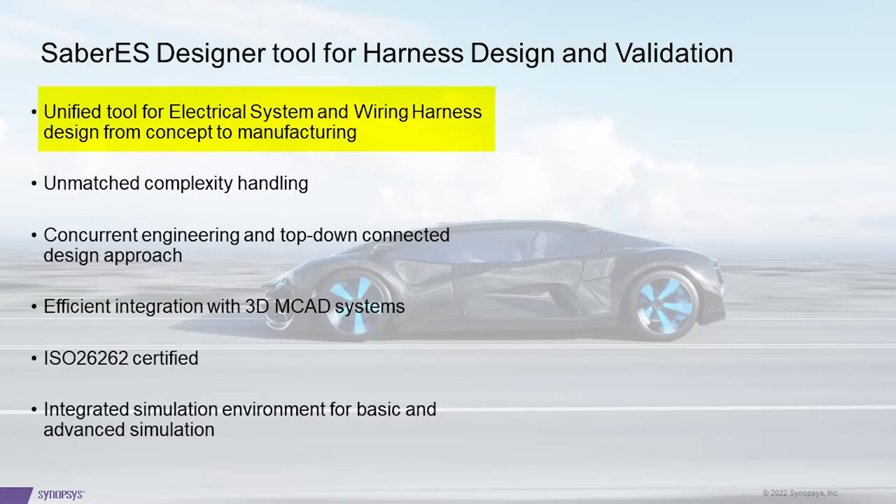The topics which will be discussed are introduction to SaberES Designer, what is custom bundle design and its benefit, a demo of custom bundle design flow in SaberES Designer, and the summary. Designing and validating a modern vehicle wiring system is a significant and challenging task. SaberES Designer provides an efficient solution to do this from concept to manufacturing.

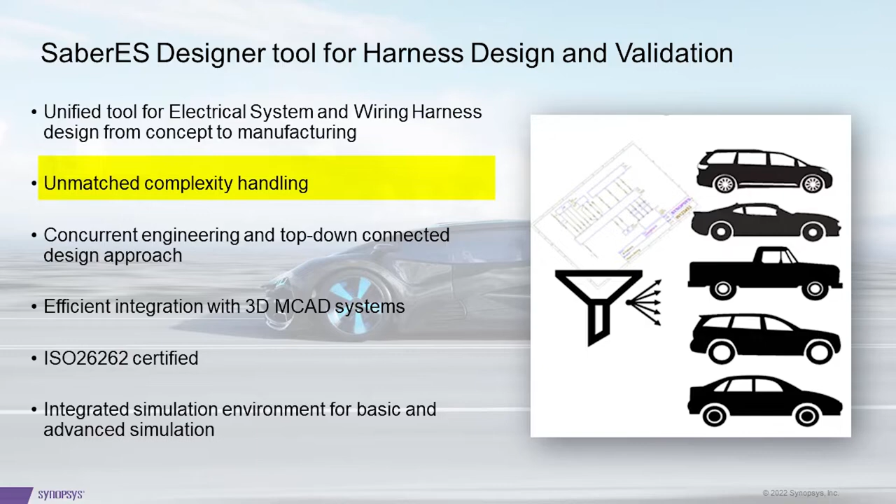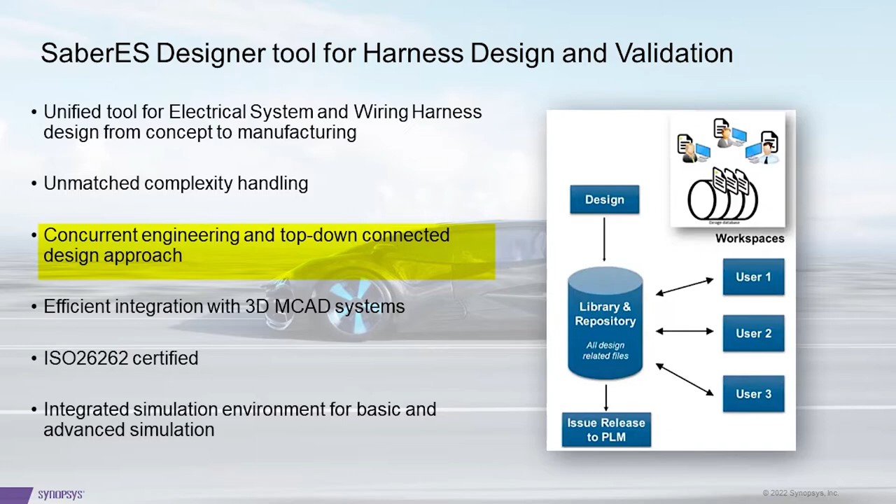Wiring harness is quite complex in nature. SaberES Designer handles system-wide design variants and enables you to design wiring harness from a variety of complex systems and vehicle models. It supports concurrent engineering by offering robust check-in and check-out from a single design database and maintains data integrity through top-down connected design flow. It allows efficient integration with leading 3D MCAD systems such as CATIA and Creo.

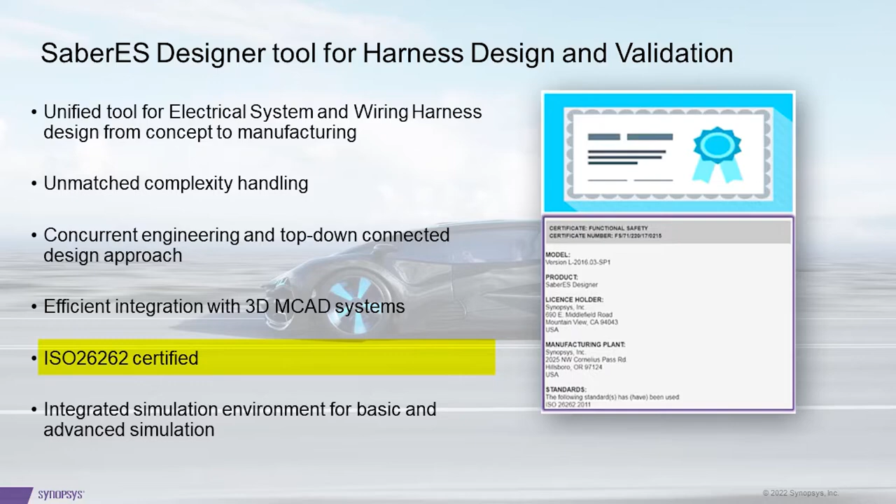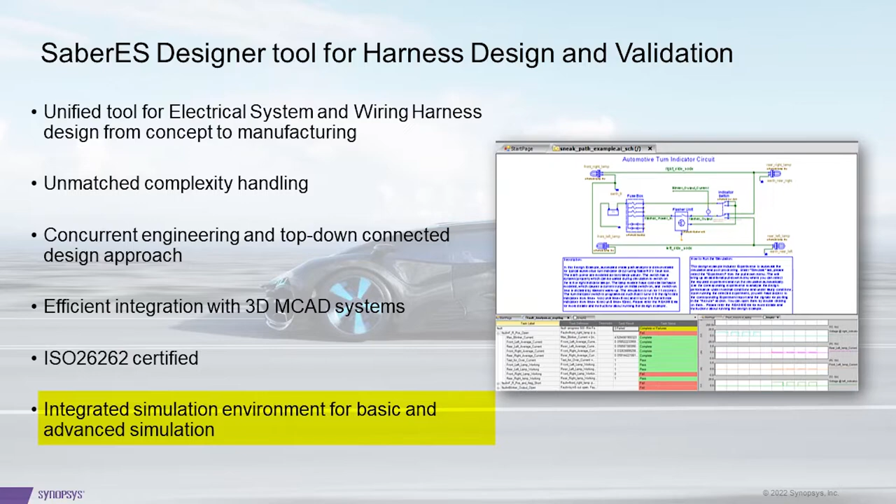SaberES Designer is an ISO 26262 certified tool and it enables you to make wiring harness designs with functional safety. The integrated simulation environment allows you to do DC simulation such as voltage drop analysis. Advanced simulation can be done with an additional license.

Now let's see what is custom bundle design flow in SaberES Designer. To understand this, let me first give an overview of the regular flow. In the regular flow, we start from picking items from the corporate library and go through the wiring and the bundle design. The changes follow a top-down approach and it is very efficient for mainstream vehicle projects.

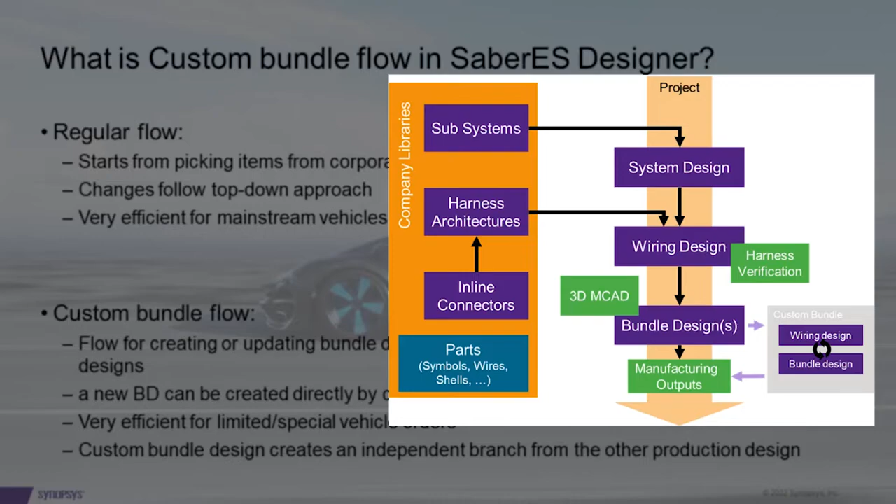Whereas the custom bundle flow is used for creating or updating bundle drawings with special changes directly from an existing design. A new bundle design can be created by directly creating filters in the assembly library. This flow is very efficient for limited or special vehicle orders. Custom bundle design creates an independent branch from the regular production design branch.

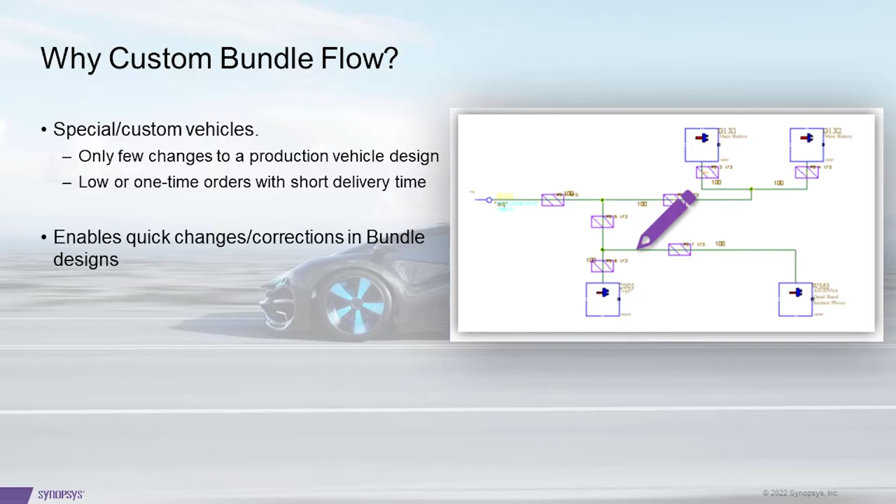After understanding what is custom bundle flow, we must understand why this flow is required. Sometimes your customer might require a few customized vehicles for special applications and you might need to design and deliver them in a short time. In this situation, custom bundle flow will be helpful. Also, when orders of the vehicle are few, such a workflow is useful. OEMs can also use this process when a bundle design has been released already but requires a small correction. Custom bundle flow can be used to make quick modifications to the design and re-release the design.

Without custom bundle workflow, when a quick design change is needed, one will have to first make a save as of the existing wiring design and then delete the unwanted data from the wiring design, and keep the area of interest in the wiring design, then make the necessary changes to the assembly library and also to the data in the wiring design. Now import the data in the connected bundle design and then add the bundle design specific items here. This might be a cumbersome process and custom bundle can make this simple.

With custom bundle flow, there are two workflows available: 1. Start by creating a new bundle design, and 2. Start by copying an existing bundle design. In custom bundle flow 1, we create a new bundle design, then add the required data in the assembly library like the harness, sub-harness, assembly, design option and variable, and then we import the wiring data by selecting one of the wiring designs available. Now the filtered wiring design will be embedded into the custom bundle design.

This design can be edited according to the project need. And then import the data in the bundle design. The bundle design can now be edited to add suitable passives and then the bundle design can be released.

In custom bundle flow 2, we choose a bundle design which closely matches the customization requirement. We then make a save as of this bundle design. Wiring design and assembly library will already be available in this bundle design. We can edit them according to project need, then import the edited wiring design into the bundle design, add passives to the bundle design according to project need, and then release the bundle design.

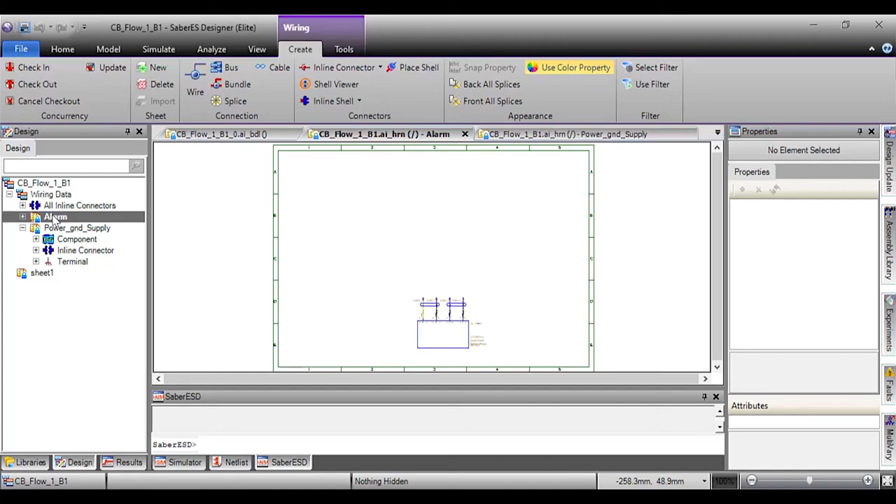Import the wiring data from the most suitable wiring design. This can be done from the Tools tab, Wiring Design Data icon. You can see that here we have just one wiring design, so we import that. You can see that the imported wiring design is a filtered version of the actual wiring design. Now make the necessary changes to the wiring design and import the changes into the bundle design. This is the demo of Custom Bundle Flow 1, where we start from an empty bundle design.

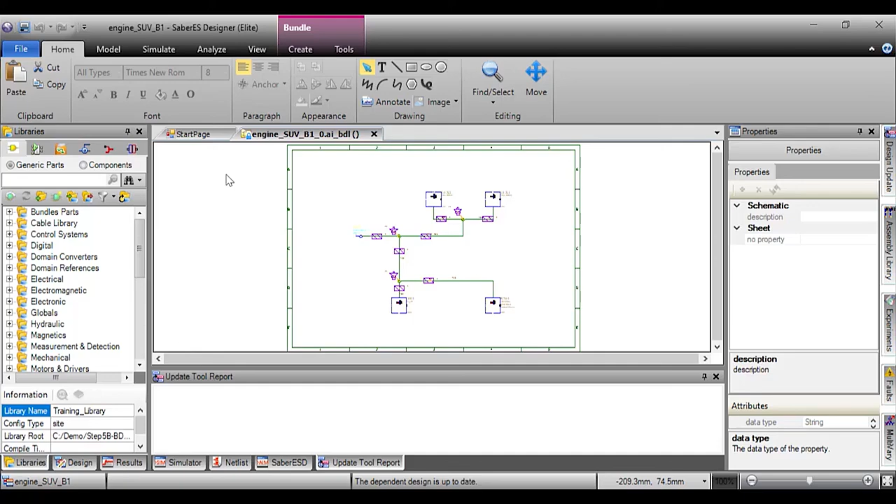Now let's go through Flow 2, where we use an existing bundle design to create a new custom bundle design. Open an existing bundle design and make a save as of this. Give an appropriate name for the new design. You will now see that the custom bundle design has the design data. It has the wiring data and it also has the assembly data.

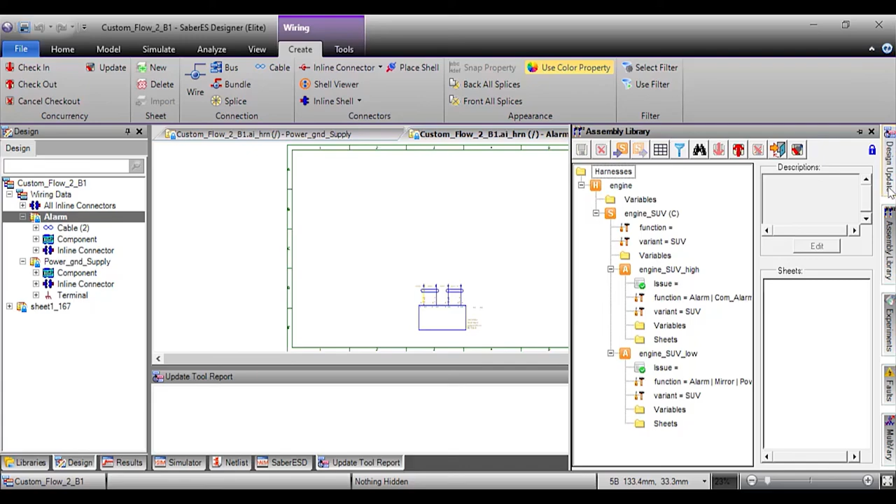Modify the wiring data according to requirement and get the required changes into the bundle design from the Design Update tool. Please note that when a custom bundle design is created, it is now an independent branch and no longer a part of the production vehicle design branch.

To summarize, Custom Bundle Flow accelerates the bundle design release process for special or custom vehicle projects. Error correction or modification is quicker with this flow. This flow also complements the top-down design flow.